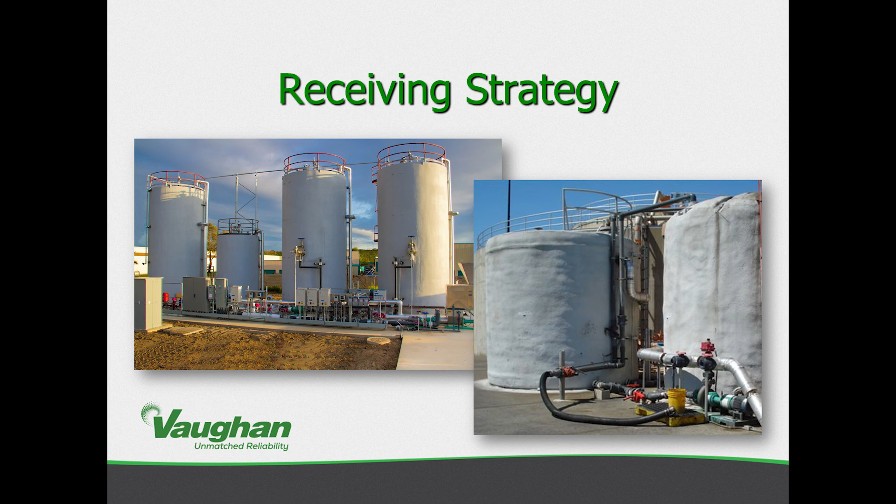So feeding strategy. Maintain balanced feed rates to the digester. Don't dump an entire truck of FOG out of nowhere. There's a whole lot of reasons why you don't want to do that, but any spike loading that you're going to provide to your digester is going to create imbalances. And we'll talk about why in just a minute.

Feed small amounts often, and continuous feed is the best if possible. In some cases, you might not have the personnel or the controls to provide for continuous feed. You may not even have the organic load or the volume to do that from the standpoint of pump capacities and things like that. But whenever possible, a continuous feed to a digester is going to be the best strategy.

I know that there is a mentality about feeding and decanting, and there's definitely a place for that. But you have to remember that the majority of digesters are continuously stirred tank reactors, and we should be operating them in that configuration if that's how they're designed to operate. I would say 95% of digesters in the US at least are continuous stirred tank reactors, which means you should be continuously stirred. You're mixing all the time. You're maintaining homogeneous volume, which is going to be best for your biomass and your gas production.

But it also means you can't really decant. You shouldn't be separating out your digester contents, and trying to operate in that is going to hurt your gas production, hurt the stability. So just something to keep in mind. Use metering and blending to control the addition of high strength waste and spread them out over time.

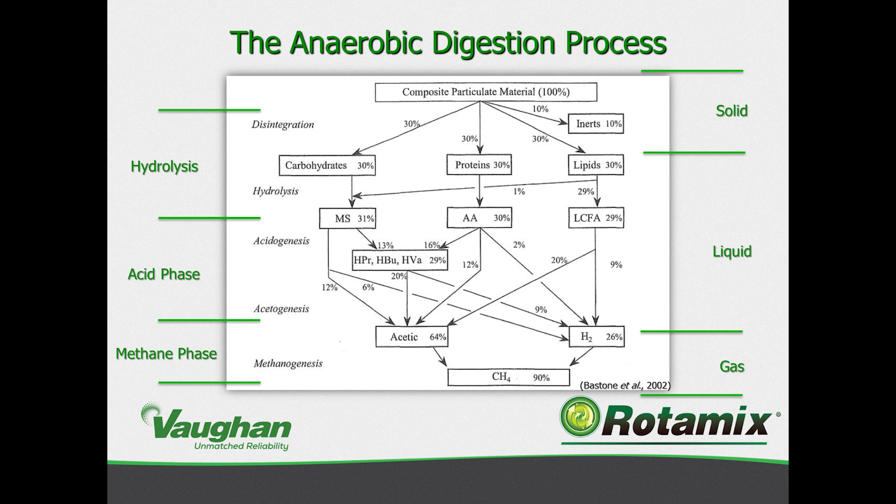So up here you've got your solid, your liquid, and your gas. I like to provide this to give an understanding of, before disintegration, before hydrolysis, everything is kind of solids floating in the soup. And as you break it down to these acids, they become soluble and move into that liquid phase. And then those get uptaken by your methanogens and produced into gas, and the gas will bubble up into the headspace. So a balanced diet: FOG, sugars, and proteins.

We're going to deep dive into these three. So FOG is going to be greater than 90% volatile solids, 95, 96, 98, depends on how pure the FOG you're receiving is and how much contaminant there is in it. Very, very high methane potential. And I think the key here is it quickly hydrolyzes in the digester. We're talking about less than a day.

There's not a lot of lag between adding the FOG to the digester and seeing that FOG producing gas, because that breakdown of FOG, especially if it's restaurant grease or already processed oil, you're going to be breaking that down directly into those long chain fatty acids, and that's going to be converted directly into acetic acid. So you've got very few steps and a very quick metabolized process that's going to hydrolyze that, turn it into the constituents needed to make that methane.

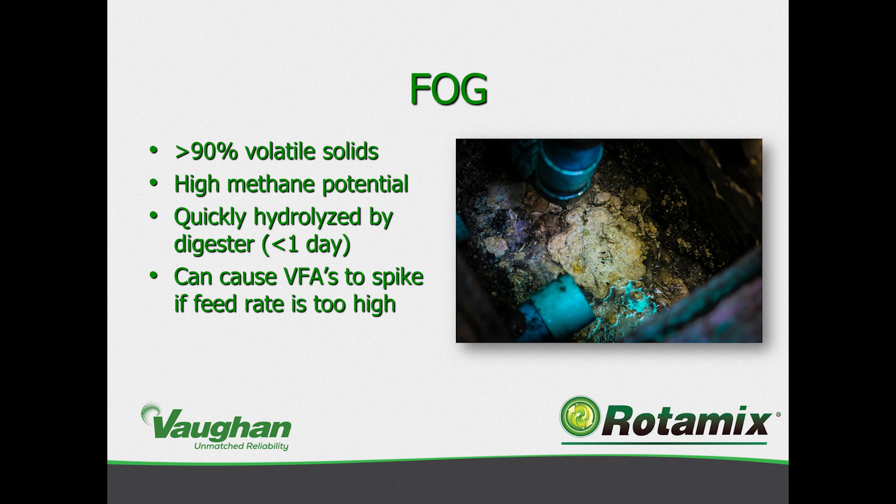So sugars, these are going to be your carbohydrates. If you're receiving food waste or various other things, sugars are a pretty strong organic building block. I would say the majority of what you're going to receive besides FOG is going to be sugars. And these are going to be from many different sources at many different strengths. There's a large variability in volatile solids and methane potential, but pure sugar acts very much like FOG. It is refined. It's going to very readily hydrolyze. You're going to have very, very high methane potential. The organic component of that's going to be greater than 90%, up to 100%.

But the key here is that processed sugars may hydrolyze in hours, but cellulose and other complex sugars are going to take days, because in a lot of those cases, it's going to take enzymes, it's going to take specialized biomass that is able to attack those complex sugar networks. And things like lignin, which is technically a sugar, you're probably not going to be able to break down at all. It's probably just going to act almost like an inert in your digester. So don't take waste from mushroom farms, I guess, would be the takeaway there.

But processed sugars, they're going to be like jet fuel as well. If you're getting confectioner's waste from a candy manufacturer, which I've seen projects that received a steady supply of, it's going to act just like FOG in the sense that you're going to see some great methane production, and you're going to have the same sort of operational challenges that you might have if you're receiving purely FOG to augment your digestion process.

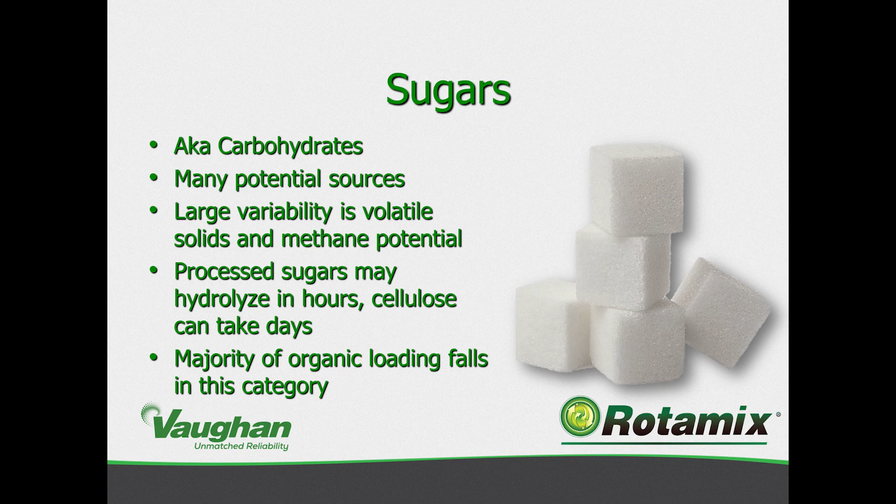And again, the majority of your organic loading is going to fall into this category for the most part. Proteins, these are complex organic molecules. If anybody's ever seen those protein images where they're folded on top of each other and folded and folded and folded. Proteins are very complex molecules. And because of that, they have somewhat poor methane potential. Not all of the protein molecule is going to break down into amino acids and components that are going to directly convert into methane production.

Very slow to hydrolyze. Again, you've got the enzymatic action. You've got to break down these proteins, denature them, break them down into their amino acid components, and that can take some time. And then they're generally going to be nitrogen rich. And really, this is going to be one of your only sources of nitrogen. There isn't going to be any nitrogen loading from your FOG or your carbohydrates. It's mainly going to come from proteins and other sources. And so when you're trying to balance your carbon to nitrogen ratio, you're going to have to look for nitrogen if you're receiving only FOG to maintain a good ratio there.

Manure and silage. Relatively low methane potential. I would mainly look at these two as augmentation. These are fairly easy to source and great for augmenting your feed rates. They kind of bulk up your feed rate. It's kind of like you're cutting the purity to some extent, trying to maintain stability and keep a steady feed rate by using manure and silage to balance your carbon nitrogen ratio, and add alkalinity if you're not getting a lot of alkalinity and you're adding a lot of acidic food waste, fruits and things like that that are going to have a pretty low pH.

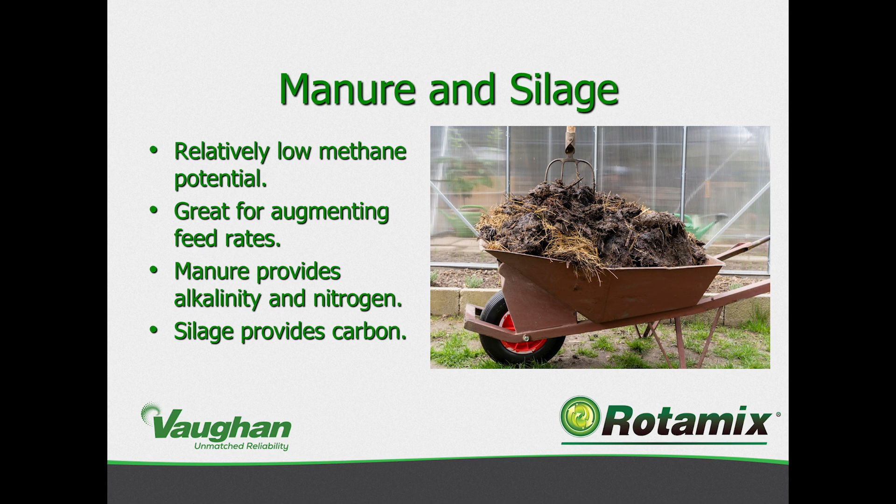There's a lot of good things that can come from adding manure and silage, even though they don't have the greatest methane potential as compared to the other sources we talked about. And silage is going to provide you carbon, which is always a good thing if you're on the other end of the spectrum and you're not getting a lot of carbon into your digester and you're receiving a lot of difficult to digest waste, and you need to provide that carbon to help balance out the process.

So meal planning: test and balance incoming feedstocks. Understand what you're receiving and have good programs to look for pH, TKN, total nitrogen, volatile solids, total solids, alkalinity. Understand all of these different factors about what's coming in, and do an inhibitive assay. Understand if there's any inhibitive substances or any inhibitive potential in the incoming feed, and try to either turn that away or understand that this is going to be a problem and find a way to balance that out and minimize the impact.

Providing a consistent organic loading rate. So don't just look at pounds that you're adding to the digester. You want to look at the organic load that you're providing to the digester. Just because you're providing the same pounds per day into the digester doesn't mean you're providing the same methane potential or the same organic load. This is where blending really becomes key, where you can take all these different constituents, set up a feed schedule into your blend tank, and then your blend tank is providing a very stable feed that may be averaged over the course of a day rather than being point sources going into the digester.

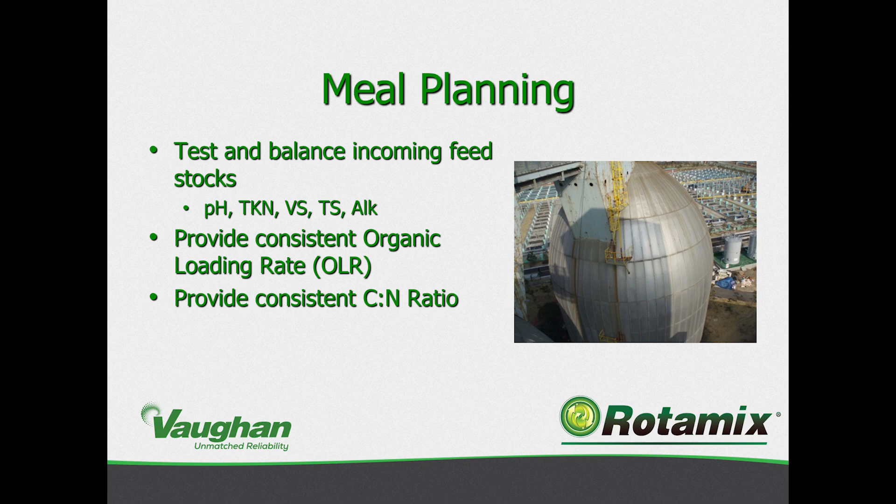And then provide a consistent carbon to nitrogen ratio. Again, these are all things that are looking to balance the load and maintain a stable load into your biomass, because your biomass is going to be selective for the conditions in the digester. And so if you're constantly varying those conditions, you're never going to allow one biomass to take over and provide for the highest methane production and biomass production rates.

So important targets: pH of 7 to 8. I know there's a lot of discussion about 6.5 to 7.5. And I think if anything, 7 to 7.5. Once you get below a pH of 7, your methanogens are going to be inhibited. And if you get below 6, they'll stop functioning altogether. But once you get below 7, you're going to start inhibiting your methanogens, which is going to cause your volatile acids to start to build up, because the bottleneck then becomes the conversion from volatile acid into methane.

And so maintaining a pH above 7 is going to be really important, especially if you're receiving a lot of high acid food waste, to make sure that you're maintaining your methane phase and not inhibiting it. Now, once you get above 8, you start to have other issues. So I think staying in the low 7s is probably the best bet, but I really wouldn't recommend operating at 6.8 or 6.7 if you can avoid it.

So your volatile acid alkalinity ratio, this is a good proactive thing. You want to keep this below 0.1. I know I've seen below 0.35 as being something that seems to be pervasive in the literature, but once you get to 0.35, you're really past the point of no return. If your volatile acid alkalinity ratio is 0.35, either your alkalinity is way too low or your volatile acids are way too high. And either one of those are going to create runaway problems that are going to lead to a pH drop in your digester without immediate intervention with bicarb or other alkalinity.

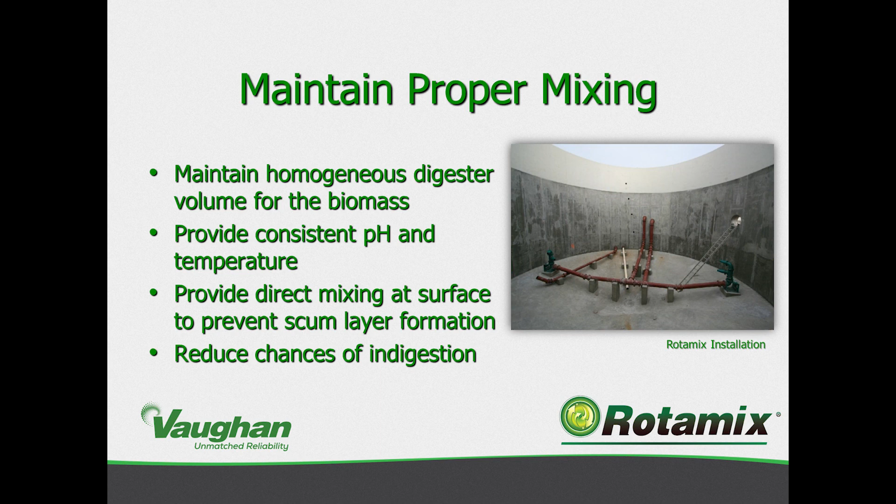There's a couple different ways to do that, depending on what you're receiving and how bad that issue is for you. But definitely consider it, especially if you're building a new digester, or you're reconfiguring an existing digester to take on new feed constituency. This is all going to reduce your chance of indigestion and digester upset. So, Rotamix mixing systems, just real quick.

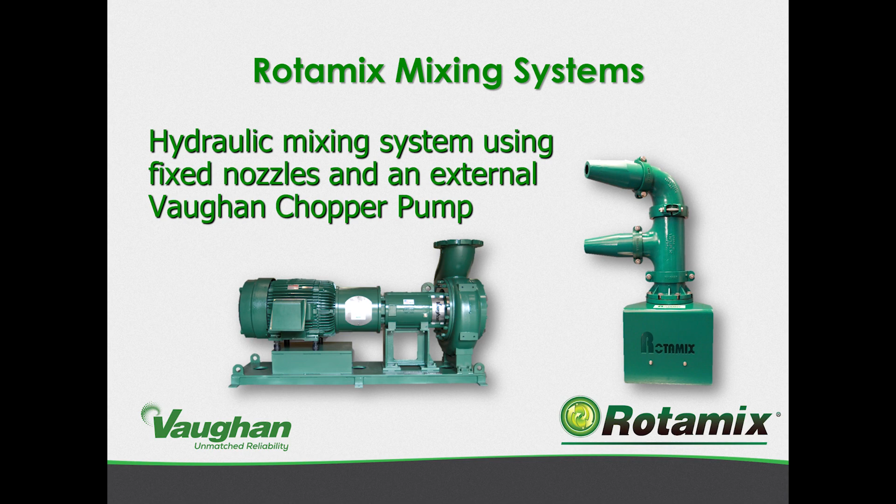So our hydraulic mixing system uses fixed nozzles and an external Vaughan chopper pump. There's no moving parts in the tank. We have multi-zone mixing, which creates an even mixing flow across the diameter, even in very, very large tanks, 100-foot diameter plus, and all sorts of different geometries.

We provide multiple discharge points, which creates even distribution of solids, so we can put mixing down at the bottom if you've got grit and other settleables that you're concerned about, and we can have nozzles up near the surface to deal with scum and other things, all to maintain as stable a mixing and process as we can for you.

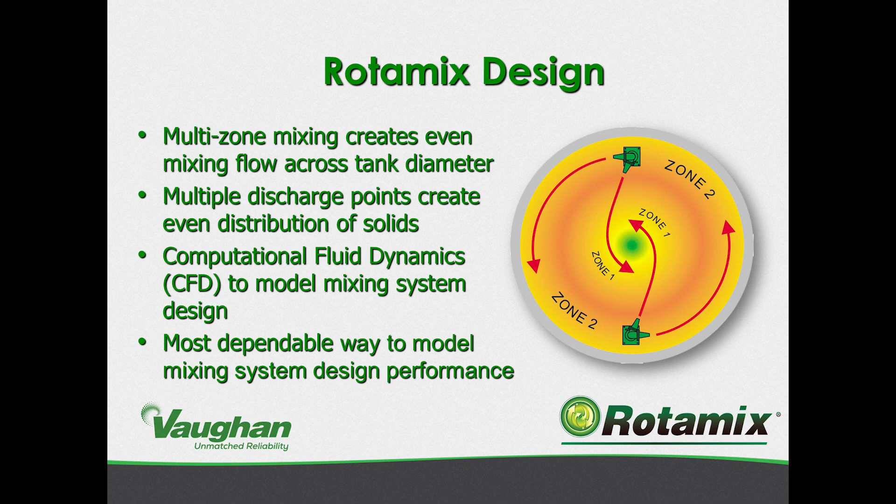We do computational fluid dynamics to model each mixing system we design, or at least inform it if it's a similar geometry or shape. It's the most dependable way to model a mixing system design's performance before you build anything. So we definitely recommend looking at the fluid dynamics of your process and having a good understanding of the rheology that's going into that.

Foam suppression. Foambuster evenly disperses droplets over the digester surface. This is one of our Rotamix nozzles with a splash plate that provides a dispersed droplet that can cover a very large surface area of the digester and maintain foam suppression. It helps control digester upsets, especially in the co-digestion arena.

You're probably going to have issues with foaming every now and then, and having a proactive solution to that is definitely going to keep everybody at your plant happy, because nobody likes a foam upset, especially when it overtops. I've seen some horror stories and pictures of what can happen.

Optional scum nozzle resuspends floatables and prevents stratification. So we provide a scum nozzle, which is a nozzle that doesn't necessarily directly contribute to the mixing, but just looks to re-entrain anything that's on the surface layer and provide constant liquid to that surface layer to keep it from drying out or caking or creating a scum layer.

And I know some of you have probably had digesters that had really nasty scum blankets, and this can help prevent that. And if you have it, we can keep it from happening again. This is used with Rotamix, or we can provide it as a supplemental system to an existing mixing system or digester to prevent foam or scum buildups.

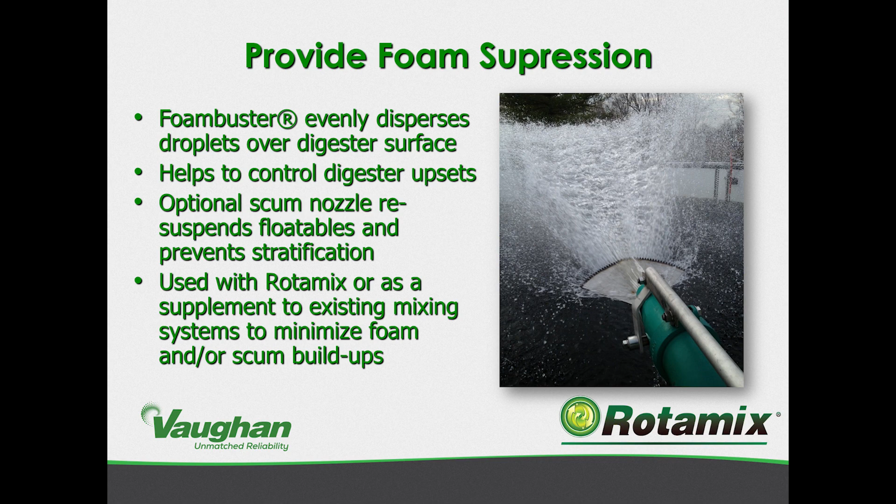So in conclusion, have a plan to ensure consistent organics receiving, and provide flexibility to control feed rates to the digester. Data is your friend. Have good testing procedures. Know what you're receiving, know what you're putting in your digester. If you have to troubleshoot an issue, it's going to give you a much easier place to start.

And it's going to allow you to be proactive rather than reactive in the management of your digester, which is always going to save money and improve your process. And maintain stable conditions in your digester. Make sure that your heat exchanger is sized appropriately for the temperatures that you're trying to maintain and the environment that you're operating in. Make sure that your pH is remaining stable.

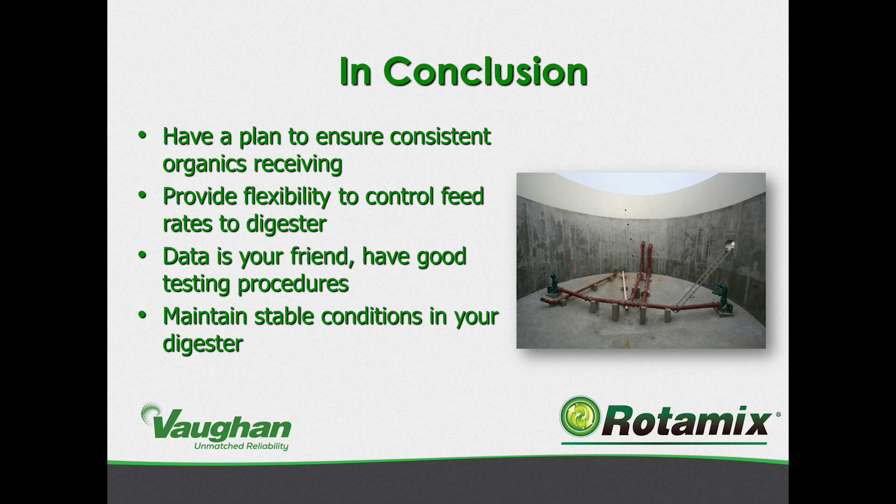And if you have pH swings because of different feeds that you're putting in, make sure that you're augmenting that even before you feed it in, to try to maintain alkalinity and pH in your digester. All these things are incredibly important.